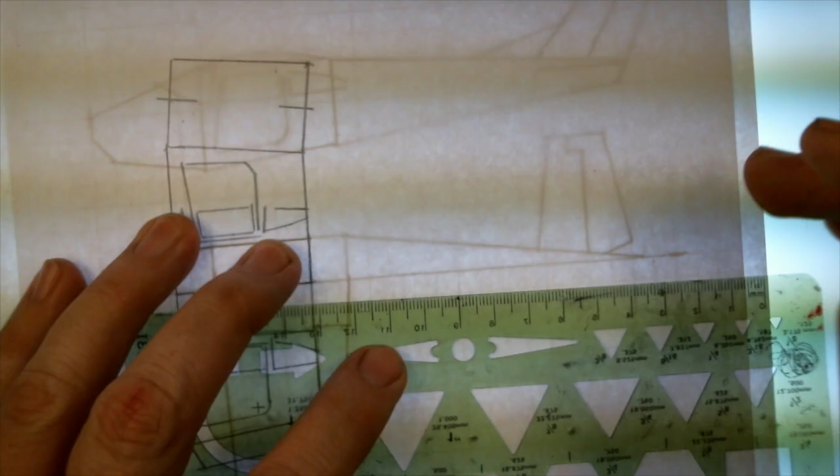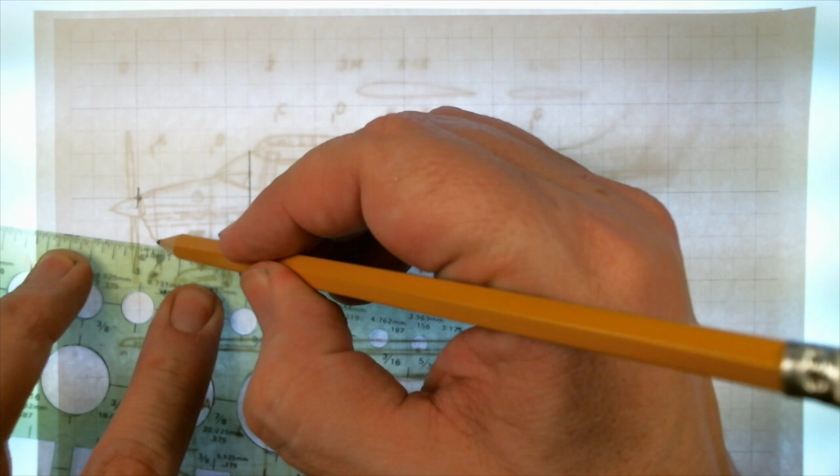So here's the side view of the airplane. Notice it's basically just three parts. This notch for the windshield and for the back window here, I have left that out. We could put them in, but I want to keep this with only three parts. I'm not even going to put the landing gear in right now. It's not necessary for this.

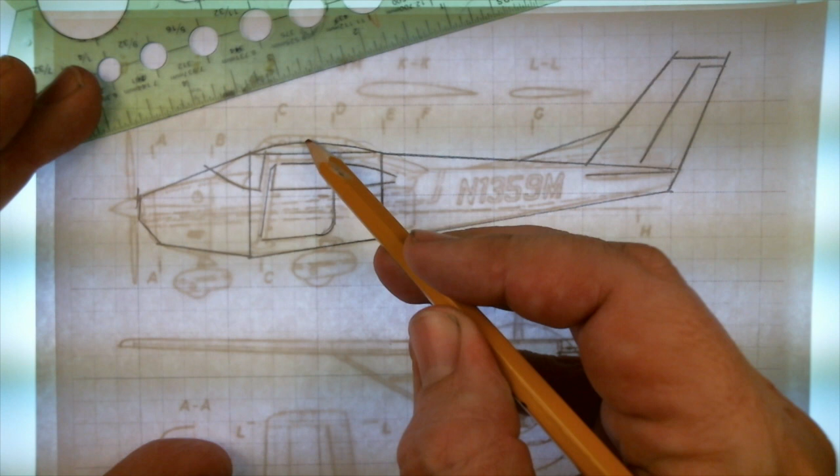Notice here's the wing, and the wing is going to have a true wing profile. It's going to be thick, it's going to be curved on the top and flat on the bottom, and it is actually going to generate lift. Our horizontal stabilizer is going to be on this line right here, but it's coming right at us, so you can't really see it.

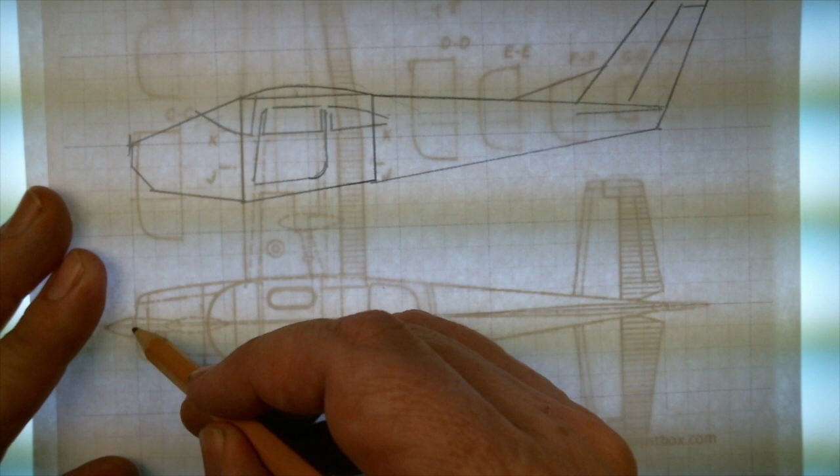Now what I'm going to do is draw the top view of the airplane. I have lined up this line here as my datum, and I've got this line as a center line. I'm going to start making the top view of the airplane, and I need to use this line so that my parts are all the same size. And this line.

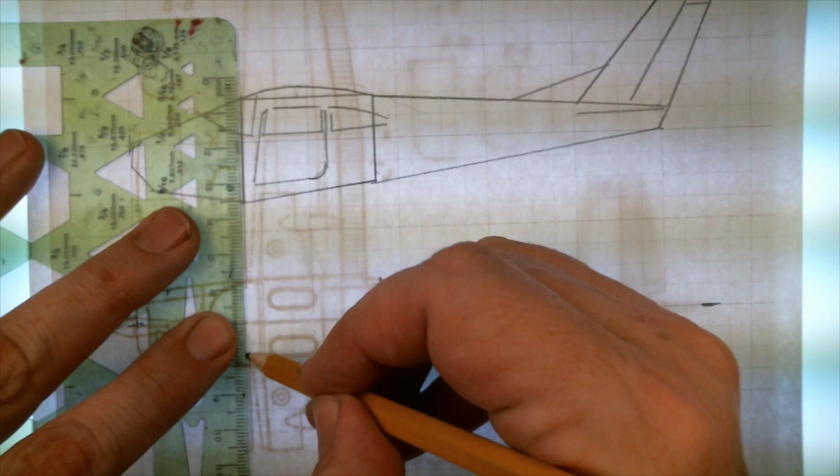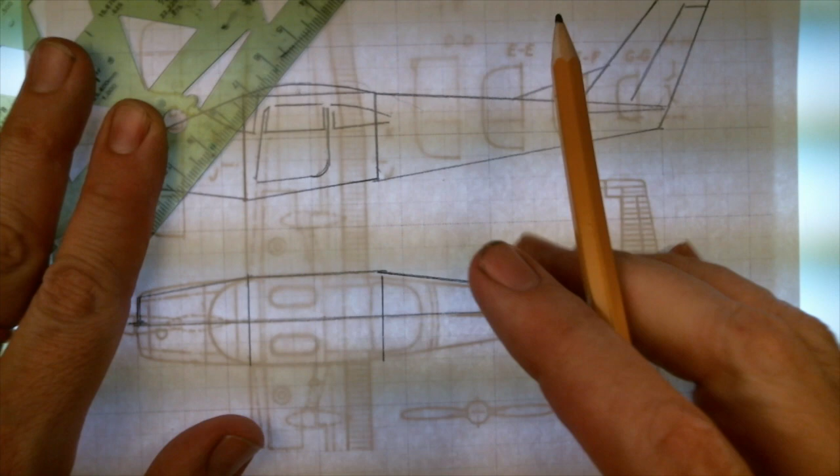Notice how I only need to draw half of the fuselage. We're going to turn the paper upside down and trace the other half. I'm going to go make the wing. Now this wing is going across the fuselage here. But I can just flip it over and line it up and trace the wing going that way.

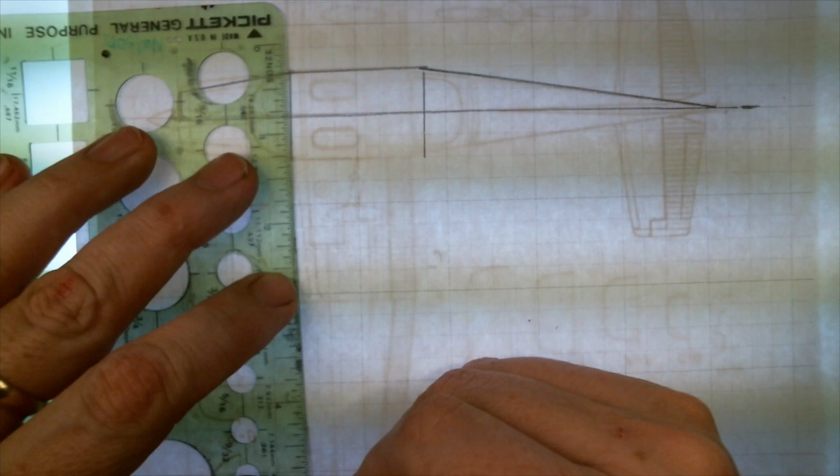We have really simplified this wing. We could make the wing come like this and have that little bend, but that would mean making the wing in at least three pieces. I would like to make the wing in only two pieces, so there's a left half and a right half.

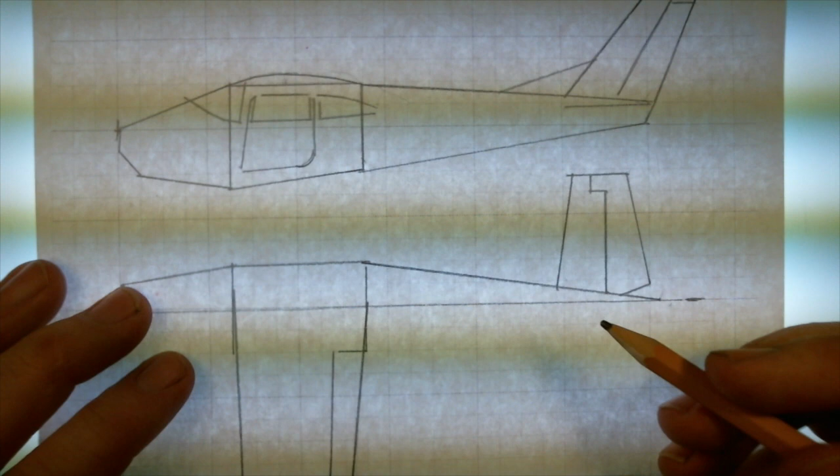The first thing we're going to do is figure out this piece right here. So the top is this, and the side is this, and the bottom is also going to be this. So we're going to start tracing this onto a sheet of paper.

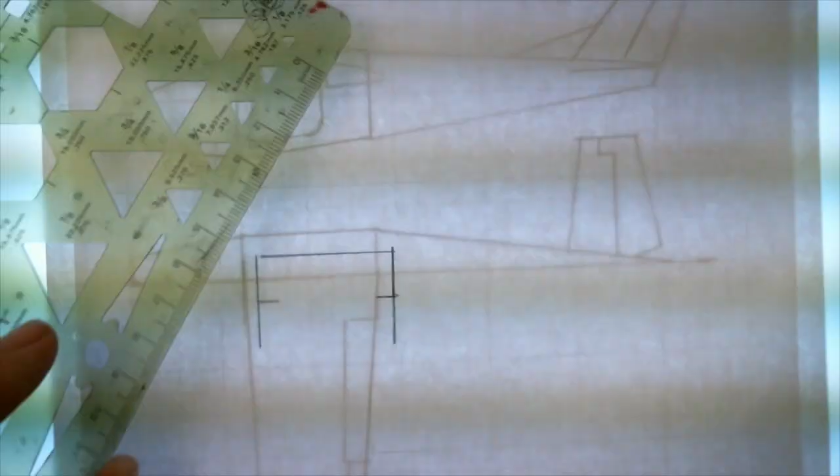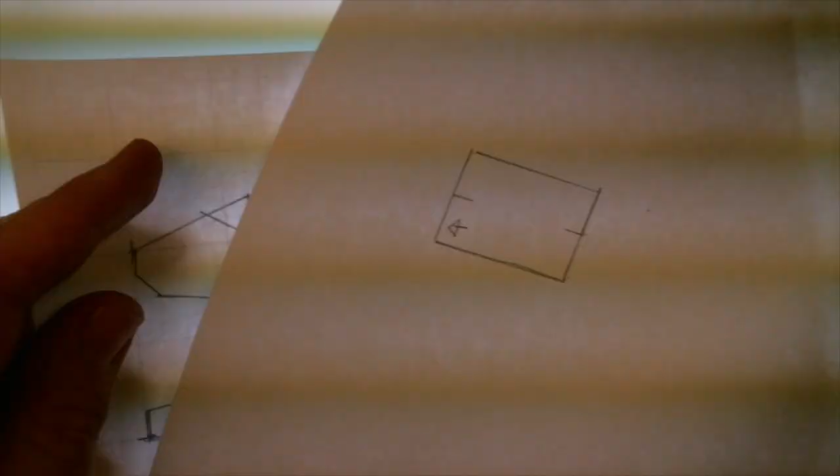So this is the roof of this central piece. I'm going to put a little arrow here to say which way is frontwards, just so we're clear. Now this top, we're going to put right above this piece right here. And then we're going to trace this piece.

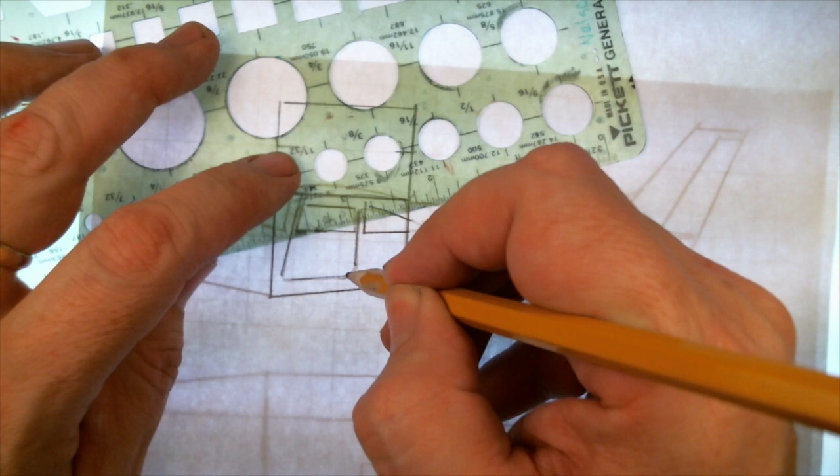So this is the left side of our airplane.

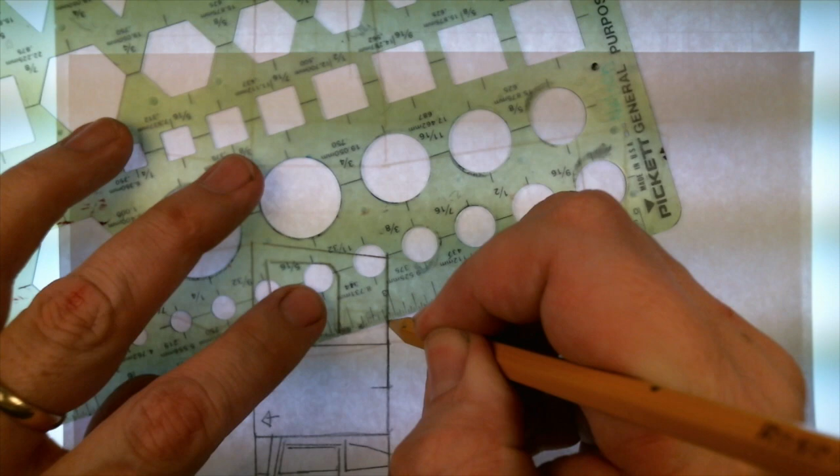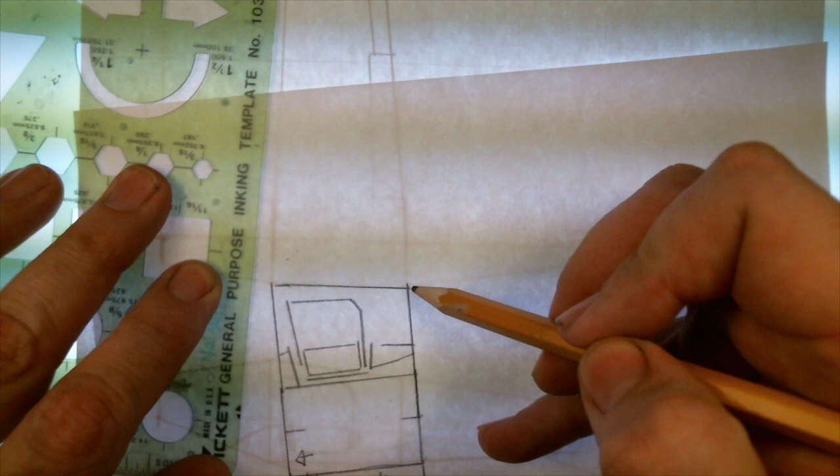So we have the top, the left, and the right side of the airplane. We need the bottom. We're going to use this top piece as the bottom, but we're going to make it a little bit longer because this slant means it's going to be slightly longer.

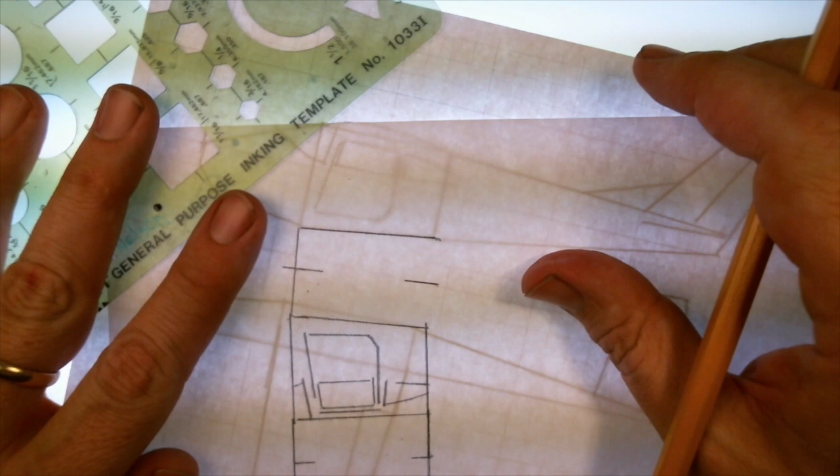This piece is done. It just needs a couple of tabs so that this edge and this edge can be stuck together. And then we're going to do the next piece. We're going to start with the center of this one.

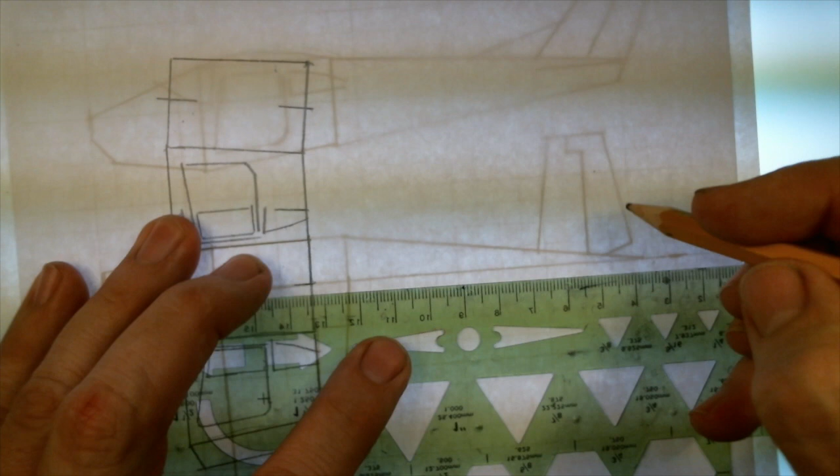Now the length is going to be a little different here. Let's figure that out really easy.

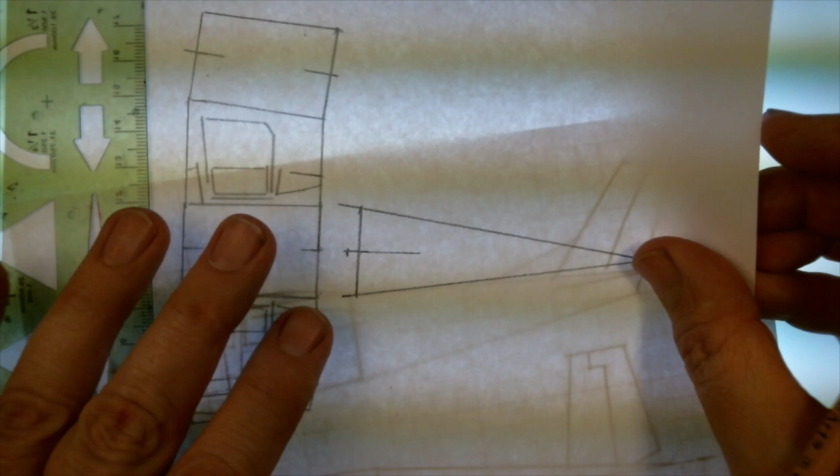So here's the top part of our tail. And we're going to put the side of the tail in here. This is a mark for the vertical stabilizer to line up. This is for the horizontal stabilizer.

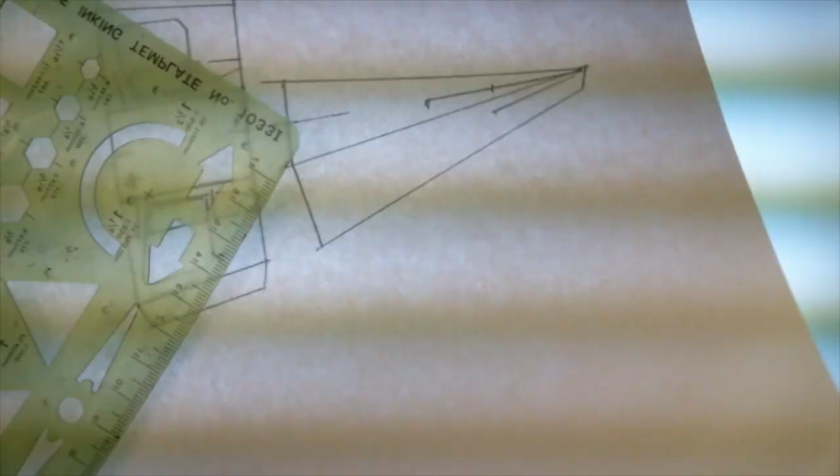So we've got the left, the top, and the right side. The bottom is going to be another one of these.

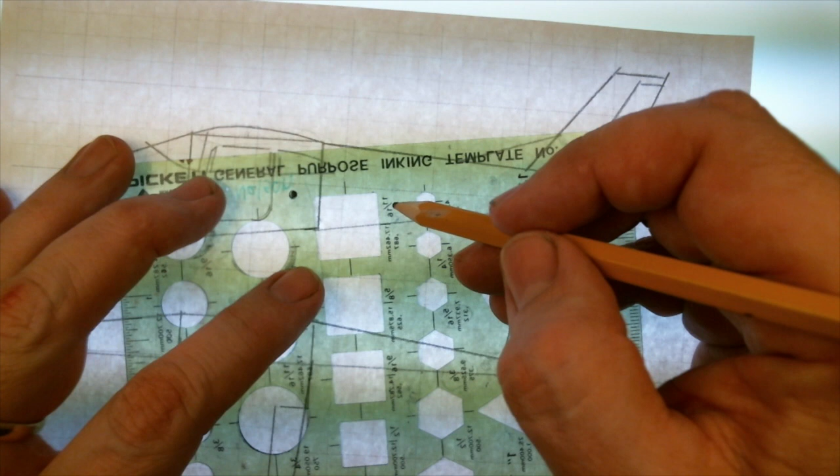Here's another way to figure out what the bottom looks like. We're going to draw it right here. We're going to use this square template to kind of keep things straight because we want this line to be perpendicular to this line. We don't want to have to eyeball it. So if we use one of these squares, we can line up this little mark and this little mark. We don't care how long it is, but that's the line right there. So now we need to get this distance here.

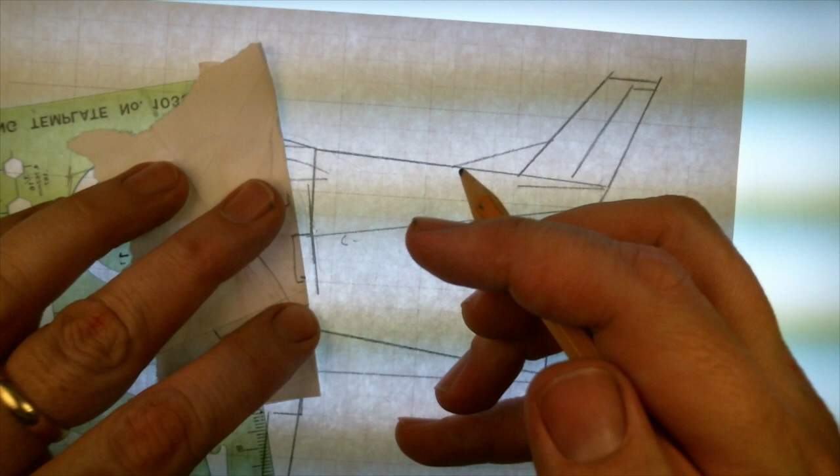So I've got the two halves of the bottom, and it's going to come to a point. So right here is the bottom piece of the airplane. It's getting a little confusing here because the center line is also the bottom line for this.

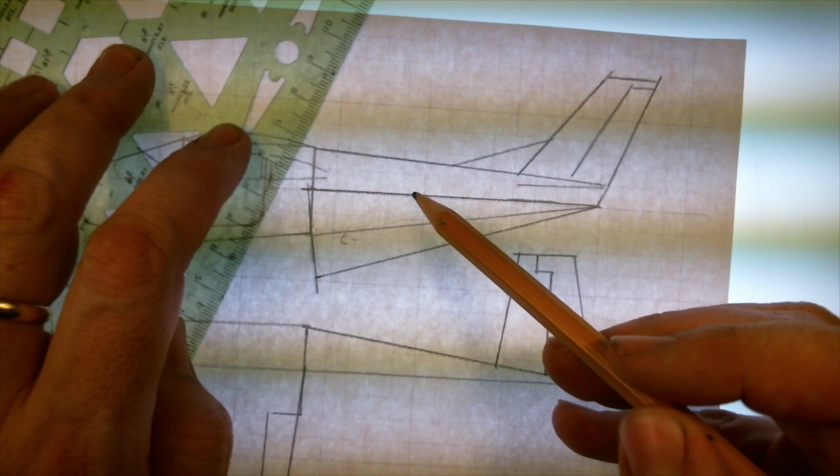So we've got the middle fuselage, the tail. Now we just need the nose, and this is the hard part. Once this is done, the rest of it's really easy.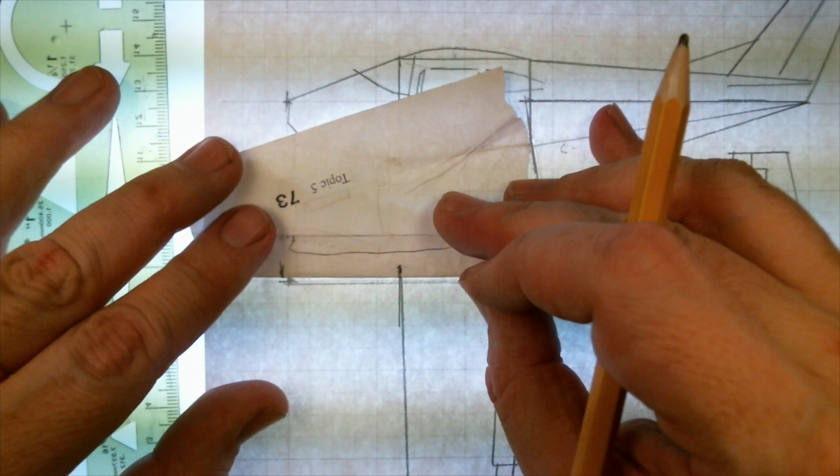This is what the top looks like from the front, but we've got the same slanty thing that we had with the car. So we need to take this measurement and we need to put it here. It's going to be a little longer than this, as you can see.

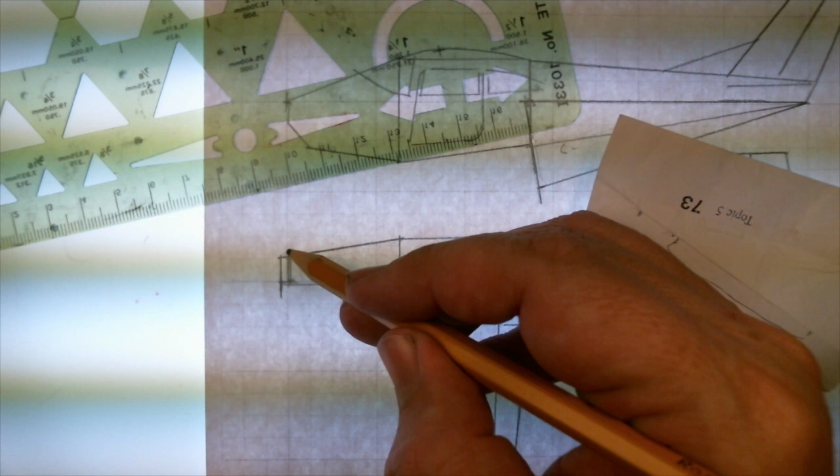So this is the actual part. This is the front view. Now this bottom piece here, we can draw here also, because it's going to be the same width. It's just going to be a little bit shorter.

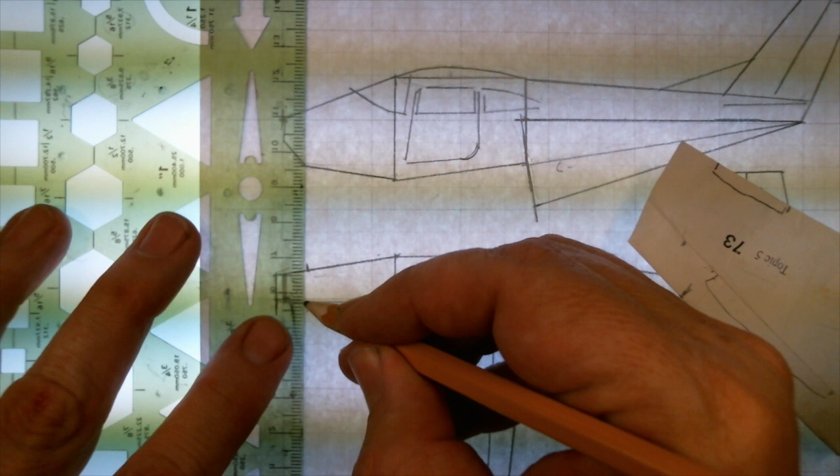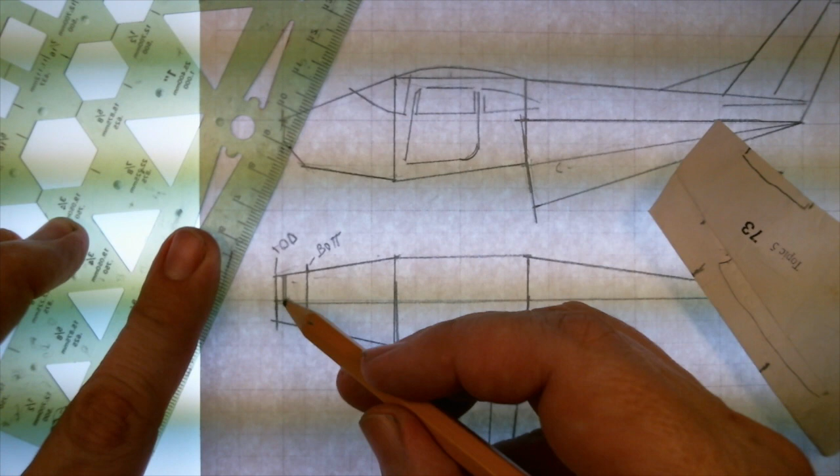So we made a couple notes here so we can keep these things true to what they ought to be. And I'm going to actually draw both sides of this so I don't have to flip it over as much. There we go. Because I've measured this distance and this distance, this whole thing should be symmetrical. So we've got our side view and our top and our bottom.

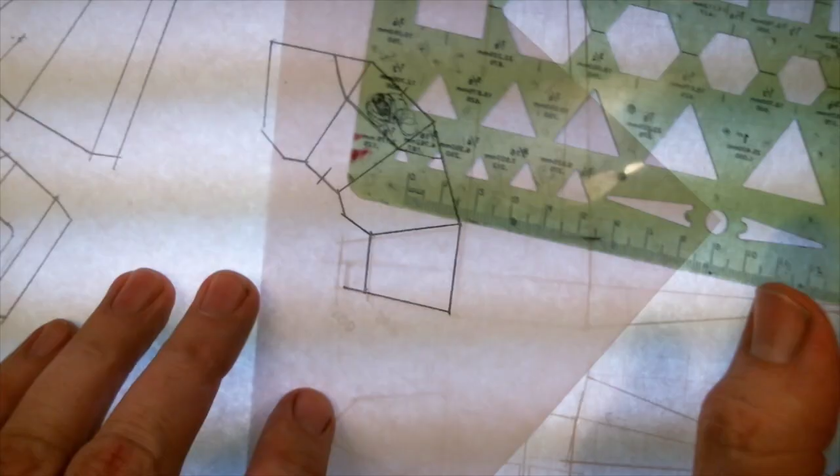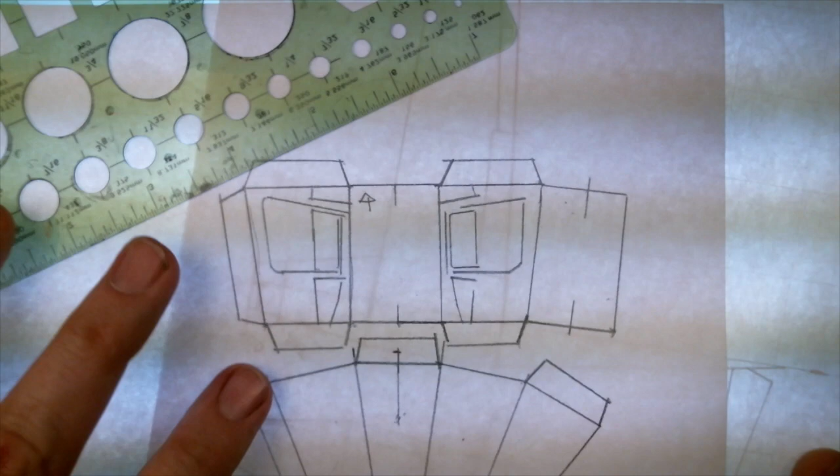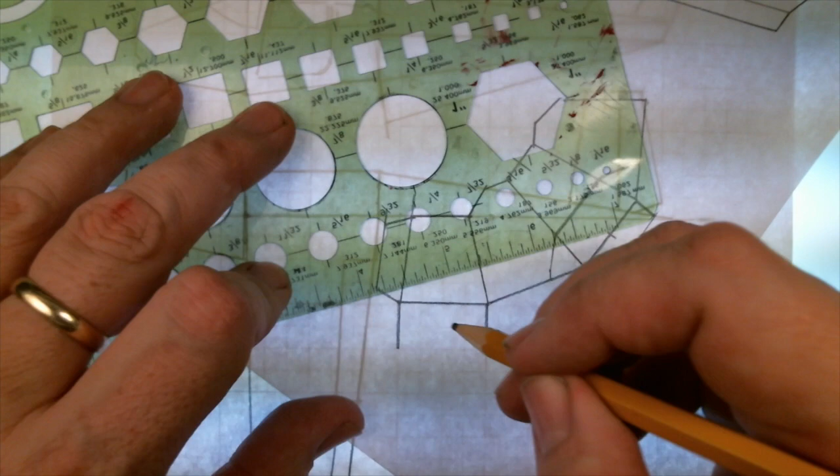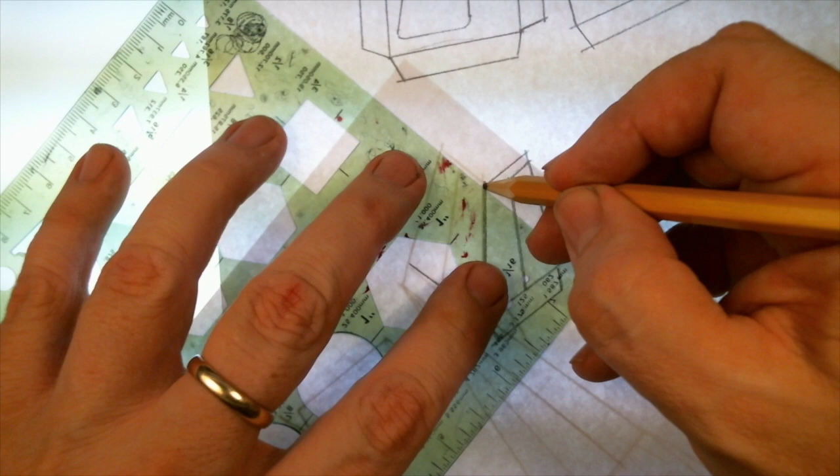So we've got 3 fuselage pieces. We do need tabs for them to stick together. This tail fin is really easy. There's your tail fin. It has a left and right side.

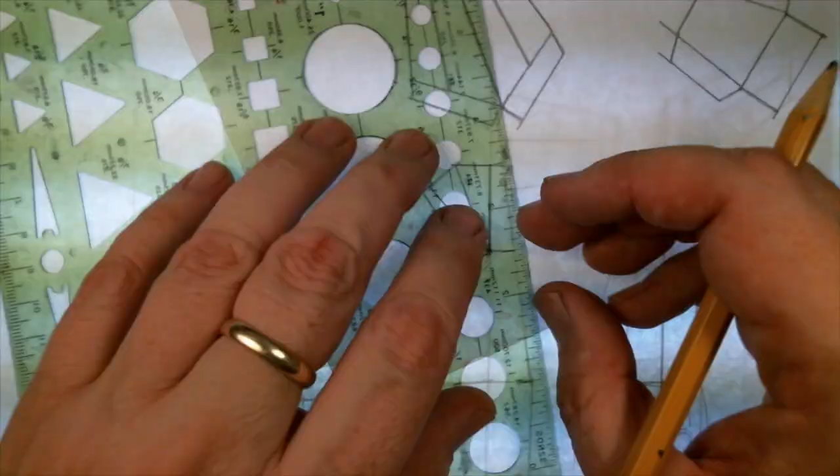And there's the fin fillet. This will give us this cranked shape that we have. We're making it out of 2 pieces. This guy is easy.

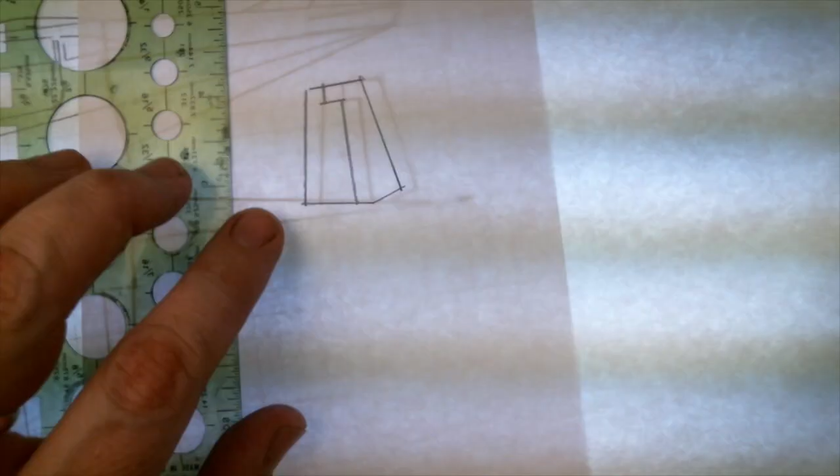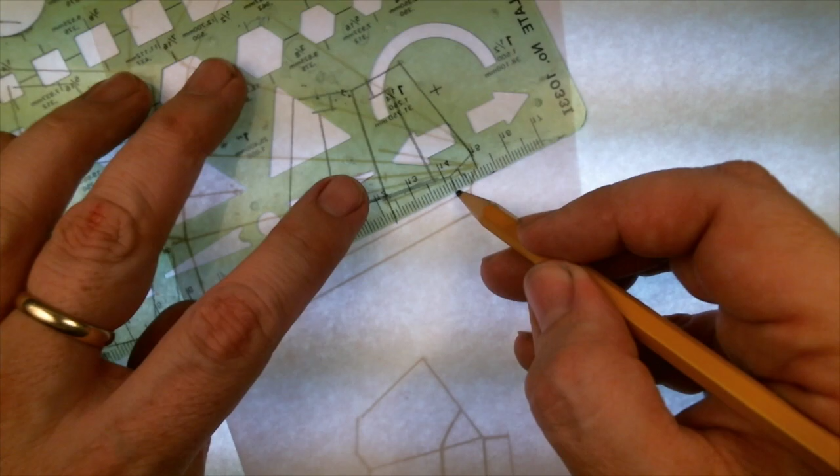Now the tabs on this are going to be interesting. The tabs have to fit on the fuselage. They can't be bigger than that. We can just trace the whole thing right here on this other sheet.

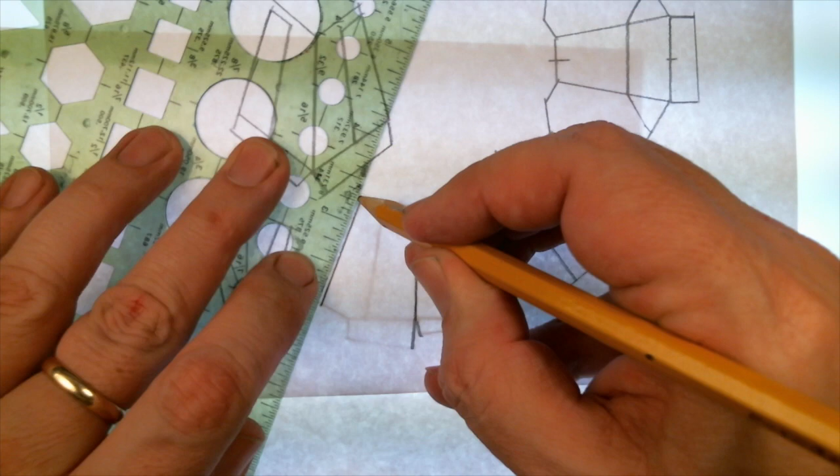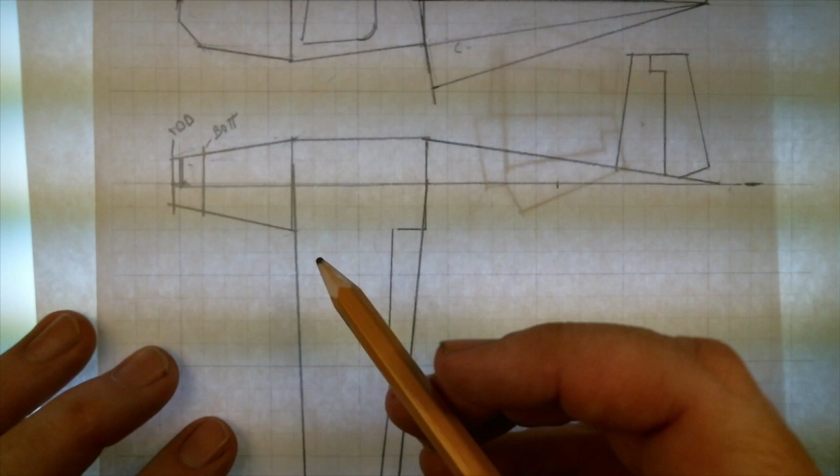We need the wing. Now, the wing is going to have a bottom half and a top half. And the top half is going to be a little bigger, which means we need to measure this curved section here, and that's going to go right there. So here we go, measuring this curve.

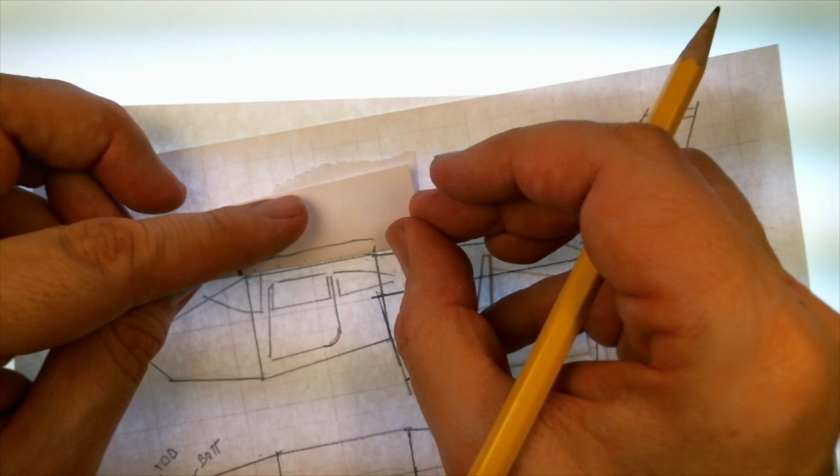You can see that this is just a little bit bigger, not a lot. You don't want to make this really big because then you'll have a big old hump like that, which will generate lift, but it'll also generate a lot of drag. And here's what I do with it. I'm going to line it up with this edge and make a new mark right there.

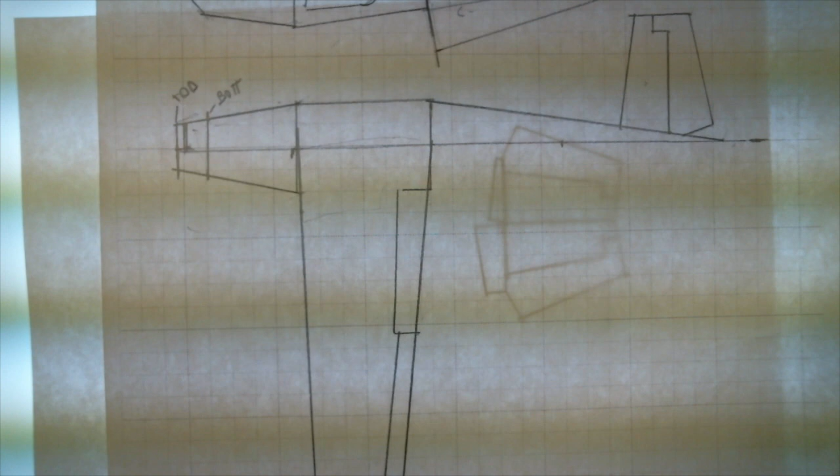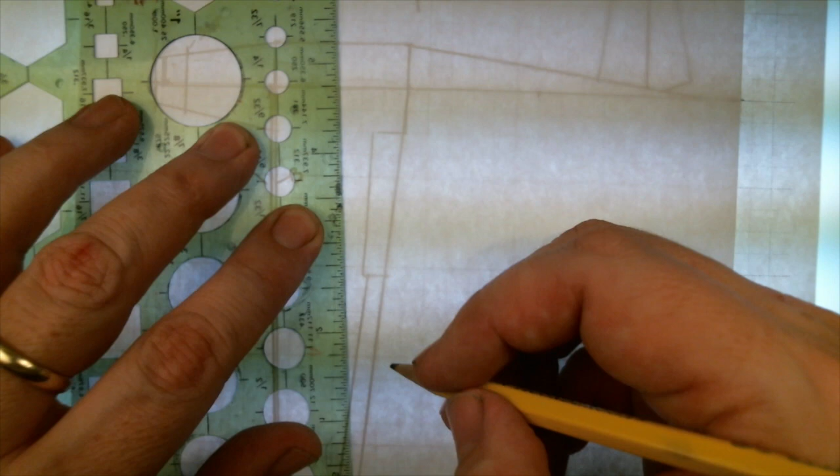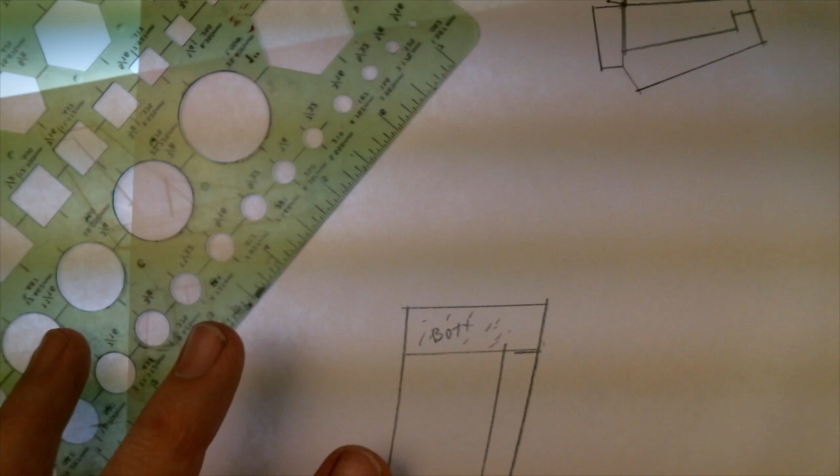So we've got two lines. This is for the bottom of the wing, and this is for the top of the wing. So when I trace the two pieces, I'm going to use two different lines. So this is the bottom of the wing. And for the top of the wing, I'm going to use that second line.

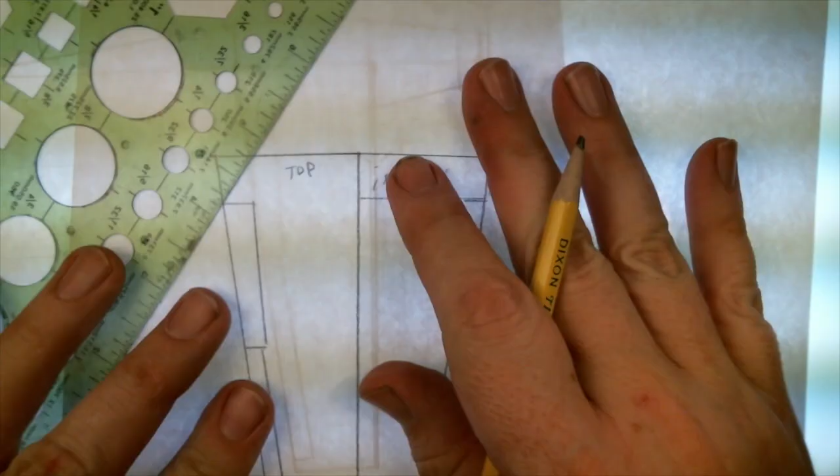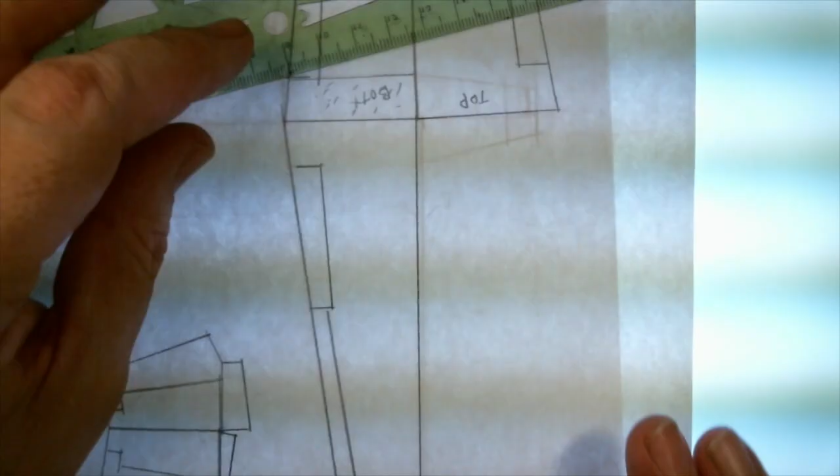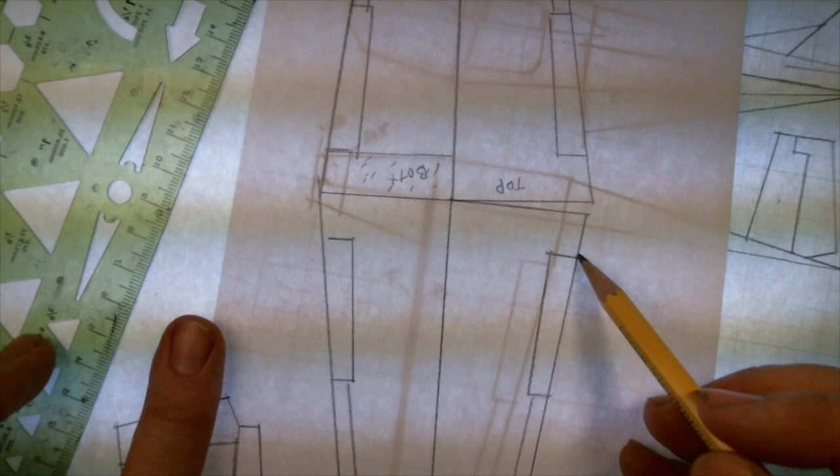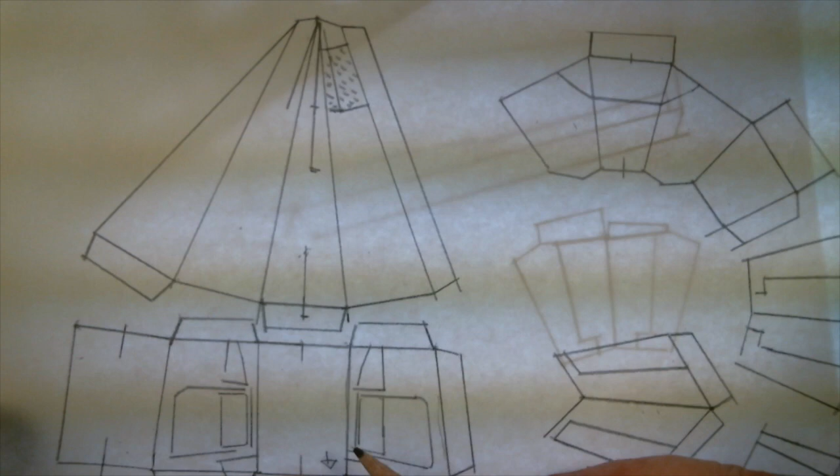Now I need to make the other wing. And here's our wing. Now we need some tabs on this so that this edge can join with this edge. So now we have a wing and one stabilizer, and the other stabilizer, the vertical stabilizer, the fin fillet, and our 1, 2, 3 fuselage parts. This thing is ready to build and make a prototype. Here's a copy of the parts that I drew.

We have a little issue here: this tab is too wide to fit in here. This is why we always test fit before we start putting glue on it.

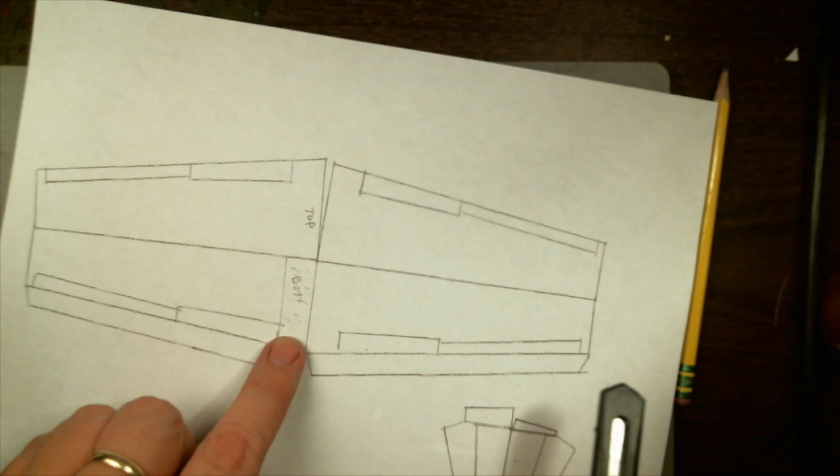And here's our wing. Now, the wing is kind of in two pieces. We do not cut here, though. That's just like a little center line I made. We do need to cut here. This little triangle of paper has to come out. And then for our wing, we got to fold these tabs in.

Now it's important as you fold this on the airplane, you have to be precise. So I'm going to pinch these two sides in, and I can kind of work my way into the middle a bit, but then I'm going to put it on the ground and mash. And that will give me a straight line.

If I try to fold it in the air like this, I might not get it exactly right. I might get a twist in the wing, which means it won't fly. So I'm going to pinch these two sides and mash. And that will give me a perfect fold right down that line.

Now notice how this little edge is bigger. See, if I just put glue and put it flat like this, it's going to be all floppy and it won't give us any lift. We're going to make this edge touch this line. And if we do that, it forces this to go in a curve. That curve will not only give us lift, but it will also make the wing kind of strong. It won't want to bend.

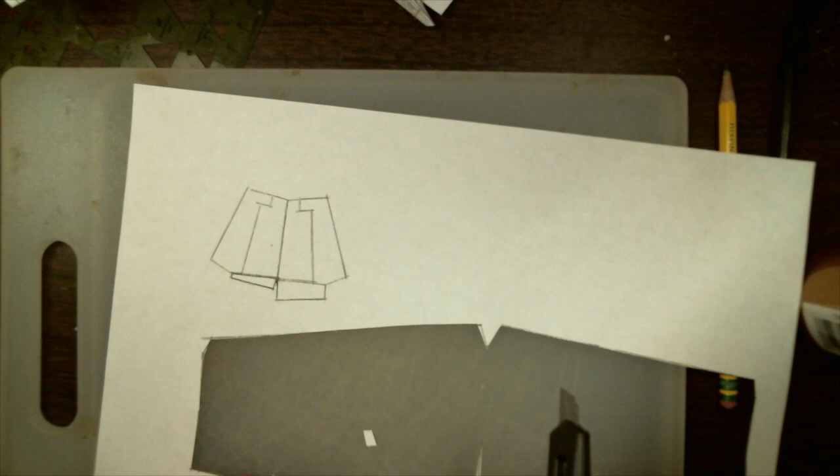And I can see that tab's a little bit too big. I made some kind of a mistake when I was measuring that, because that's a little too big. But that's okay because I can change the design and make another copy. Now we made a little area here to line this up, but again, we kind of messed up, made that a little bit too big. Now if you look at the back, you can see they're not quite straight. You gotta kind of scoot around before the glue really grabs it and make sure they're going the same way.

There's a neato trick you can do with this because the tabs are symmetrical. It means we can fold this in half and we can cut out both sides at the same time. Now the tabs on this one are also too big. You can see how they're a little bit too wide. We will have to change our design for that. Now it's important to get the tail straight. I mean, you don't want it gluing in like that because it's going to make your airplane spin.